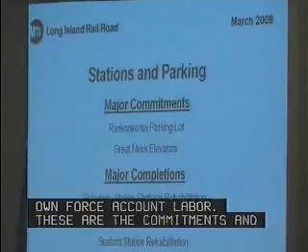Our first commitment is the February 09 award of a contract for the reconstruction of the parking lot in Ronkonkoma, one of Long Island Rail Road's busiest terminals. This photo shows the present condition, including the inadequate drainage and lack of defined parking spots. The project includes fencing, landscaping, and new lighting to enhance our security. We anticipate to gain a few spots when the parking lot is completed.

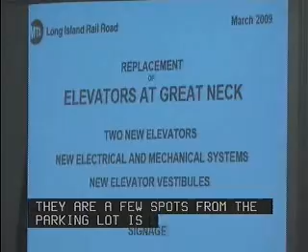The Long Island Rail Road also plans to commit $2.5 million for the replacement of 2 elevators at Great Neck Station, which too is one of our busier stations. This photo shows the eastbound platform with one of the elevators that will be replaced. The contract will include limitations on the period the elevators will be out of service to mitigate negative customer impacts.

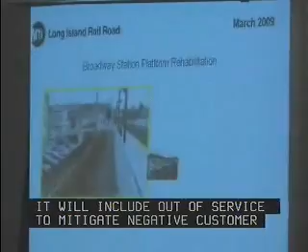With regard to our 2009 completions, we are scheduled to achieve beneficial use of Broadway Station on the Port Washington branch this May. This project includes the demolition and replacement of the original eastbound and westbound concrete platforms west of the station building and in the plaza areas seen in the upper 2 photos, as well as the new passenger shelters, railings, lightings, and communications.

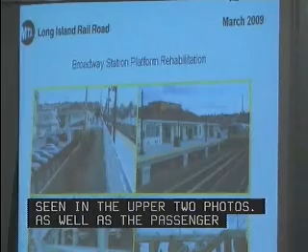Improvements to the site also include a refurbished underpass, ADA ramps seen in the lower left, retaining walls, sidewalks, new stairs, vegetation, and fencing. The picture on the lower right shows the new staircase, which includes the Arts for Transit within the design.

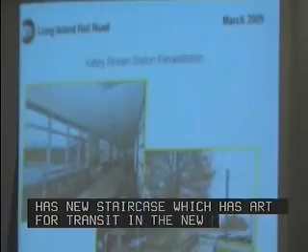Another station under construction is our Valley Stream Station project. The main elements of this project, which is scheduled for completion in June of 2009, includes a new station building, complete with a ticket office, waiting room, and public restrooms. Platform improvements include the rehabilitation of the existing platform waiting room, depicted in the upper left, and site improvements shown on the lower right.

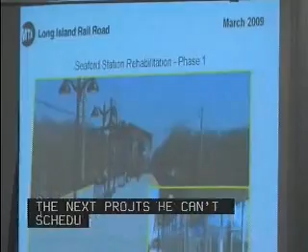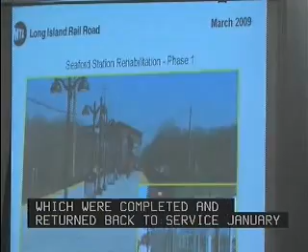The next project scheduled for completion this year is the Seaford Station, which includes replacement of the existing 12-car Center Island platform, platform canopies, the platform level waiting room, stairways, and the installation of a new elevator and escalator. In these photos, you can see the east end of the station platform and the waiting room, which were completed and returned back to service January 31st of 2009. Beneficial use of the west end of the platform is scheduled for July of this year.

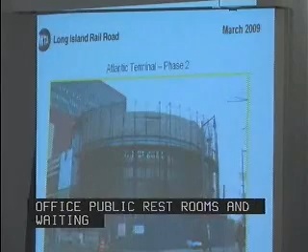The last station and parking project scheduled for completion in 2009 is Phase 2 of the Atlantic Terminal reconstruction, which includes the new street-level entry pavilion, complete with ticket office, customer waiting area, and public restrooms. The project also includes granite tile floor throughout the terminal and platforms, plus limestone walls in the pavilion and a new facility for both police and employees. This photo shows the pavilion receiving the final exterior finishes of stone and glass.

This is an artist's rendering of what the final terminal will look like. It is scheduled for opening in the third quarter of 2009.

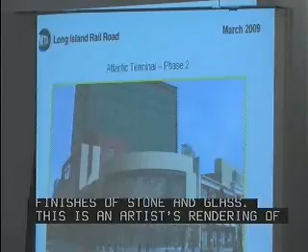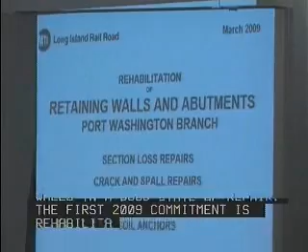With regard to our line structure category, Long Island Rail Road's focus has been on putting our existing bridges, viaducts, and retaining walls into a state of good repair. The first 2009 commitment is the rehabilitation of over 5,500 linear feet of retaining walls and select bridge abutments on the Port Washington branch. Work includes concrete repairs, waterproofing, and the installation of soil anchors. This project is scheduled for completion in the fourth quarter of 2011.

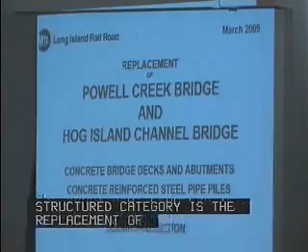The second major project under our commitment plan for the structure category is the replacement of both Powell Creek and Hog Island bridges, which are located on the Long Beach branch and traverse waterways. These bridges are over 80 years old and have timber supports as main structural elements. The scope of the work includes complete replacement of the bridge piles, using a combination of steel and concrete structural elements.

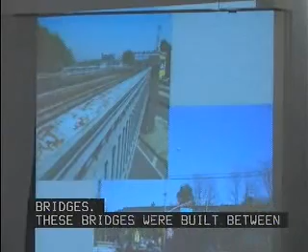Our last project commitment in this category is the rehabilitation of the Woodhaven and Queens Boulevard bridges. These bridges were built between 1910 and 1926 and are located on our Main Line and Port Washington branches just east of Woodside Station, where they are utilized by almost all of our daily train service into and out of Manhattan. The scope of this work includes abutment, steel repairs, and waterproofing.

For our commitments under communication and signal, I will discuss 3 projects.

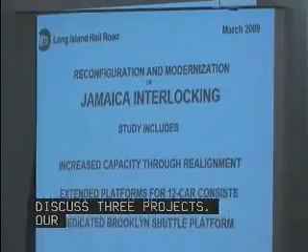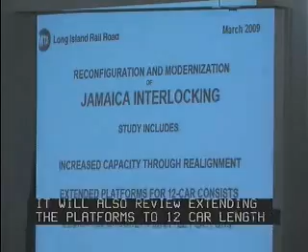Our first 2009 commitment is the reconfiguration and modernization study of Jamaica interlocking. This study will assess the best way to reconfigure the existing 100-year-old Jamaica interlocking, which has over 150 switches, to enhance the track alignment and to increase our throughput. The study will also review extending the existing platforms to 12-car length and the addition of a 6th platform for a dedicated Brooklyn shuttle. The Jamaica reconfiguration is one of our most critical projects because increased train capacity is a necessity to support our East Side Access Service Plan, as well as the railroad's plan to modernize Jamaica.

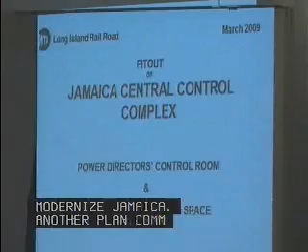Another planned commitment is Phase 2 of the fit-out of the Jamaica Central Control Complex, which is a critical part of Long Island Rail Road's plan to build a centralized train control system to improve our dispatching capabilities and repair crew responses. This photo shows the area on the 6th floor JCC building where offices for both the operational staff and the future power director's office will be fitted out.

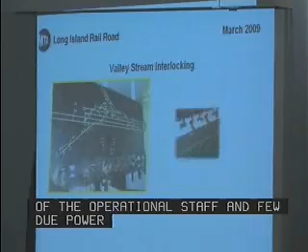The 2009 completion is the cutover of the modernization of the signal system at Valley Stream Interlocking, which is scheduled for the 4th quarter of 2009. This project will replace the existing vital relay-based system with microprocessor technology, eliminate the air compressor plants that supply horsepower to move the track switches, and replace the outdated supervisory systems that control signals on 4 adjacent branches.

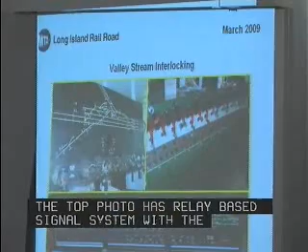The top photo illustrates the existing relay-based signal system with the 1933 Model 14 switch control board at Valley Tower, while the photo on the bottom shows the new microprocessor-based system. This improvement will remove the need to have someone manually move the levers on the Model 14 machine, or as they say, throw the iron, and now just a simple input into a keyboard is all that is required.

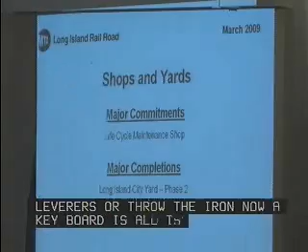Under the shops and yards category, we have 1 commitment and 2 completions scheduled for 2009. The first commitment in this category is the reconfiguration and upgrade of our shops at Hillside Maintenance Facility to improve the Long Island Rail Road's ability to implement life cycle maintenance for our fleet. The Hillside facility, which is coming up on 20 years of age, is the Long Island Rail Road's main electric fleet maintenance facility.

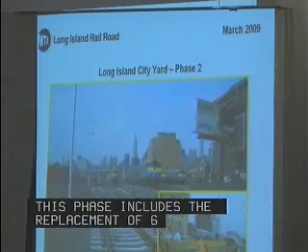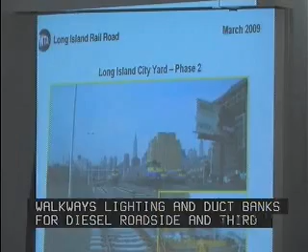With regard to 2009 completions, Long Island Railroad recently achieved beneficial use of Phase 2 of Long Island City Yard. This phase included the replacement of 6 existing tracks with 5 new yard tracks, as well as construction of a new 2-car passenger platform and 2 new car cleaning service platforms. Work also included remediation of contaminated soil, fueling facilities, paved roadways and walkways, lighting, and duct banks for future diesel, wayside, and third rail power. In these photos, you can see the new tracks with concrete ties, and in the background the new car cleaning platforms to the left of the engines.

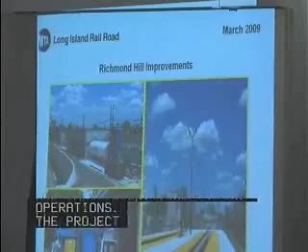The last 2009 major completion is the Richmond Hill Yard Improvement Project. This yard is where Long Island Rail Road's diesel fleet is maintained and serviced, and thus is critical to our operations. The project will include the construction of new diesel fueling facilities in Richmond Hill, 2 new service and inspection pits, an engine wash area, and a sanding facility for our diesel locomotives. Beneficial use is expected before the end of this month. Any questions?

Great work. Thank you very much. Mr. Chairman, if I might, just two comments. Not that I haven't heard it before, but I've heard it before.

The only thing I would ask, either next month or shortly: a number of months ago, I think it was last year, this board approved a short-term improvement study and improvements for the third track area, the main line development corridor. That project is an essential component of the railroad's expansion process, and I'd like to get some idea of where we are on that aspect of it. We can do that for you. That would be very helpful. I think the committee would like to know, because the railroad's expansion is dependent upon something happening in the main line corridor, and that's why either we do it long-term or short-term.

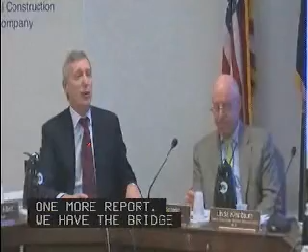All right, next round. One more report. We've got the bridge and tunnels. Tom and your folks, you're all that stands between us and lunch. I understand how important your report is. Sorry, but we need to laugh a little bit.

Okay, well, why don't we pass out your handouts, and we'll start. Technology is not what it's said to be.

Go ahead, Tom. Okay, well, my name's Tom Bach, and I'm the chief engineer with Bridges and Tunnels, and today I'll review our 2009 capital commitment and completion plans, and also two projects that we're going to be starting this year. I'd also like to review one major completion that we will have, and that's our deck replacement job on Randall's Island. And lastly, I'd like to update you on some positive progress relative to some issues that we've had to close out our Bronx Whitestone redecking project.

Generally, our 2005 to 2009 capital program is in very good shape. We committed and closed out record levels of work in 2008, and presently we've completed or committed nearly 90% of our 5-year capital program. Only two significant projects remain to be committed this year. One has already been bid, and award is expected in the second quarter. The remaining project was bid in 2008. The bidder was declared non-responsive and we will rebid the job later in the year. So barring surprises, we're confident we'll achieve 100% of our 5-year goal before the year is out.

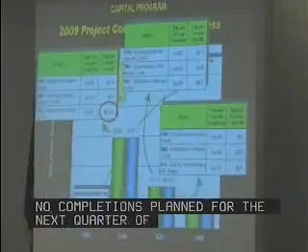Okay, that's our commitments. And next we'll look at completions. We had no completions planned for the first quarter of this year, but we are on track to complete more than $490 million of project work in 2009. And this total will be the authority's record level of completions.

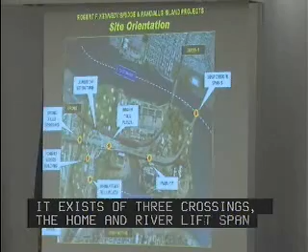Recall I said I'd talk about two major awards for 2009. Before talking about the first of these projects, TB59, the rehab of Building 104, I'd like to take a minute and explain the vital role this project plays in the R.F. Kennedy Bridge master plan. The aerial photo shows the layout of the RFK Bridge. The facility actually consists of 3 crossings: the Bronx Kills Crossing, the Harlem River Lift Span, and of course the Queens Suspension Span. These 3 bridges are linked by a viaduct, and all traffic is guided to its destination by a collection of ramps and an interchange, which is referred to as the junction structure.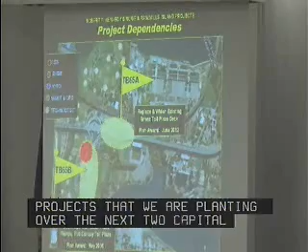The aerial photo shows the location of the upcoming toll plaza expansion and redecking projects that we're planning over our next 2 capital programs. And as you can see, the current work locations of Bridges and Tunnels and PD employees conflict with the planned plaza projects. We have hundreds of personnel and shops and warehouses located directly underneath these plazas.

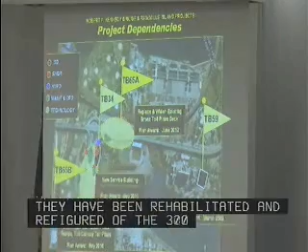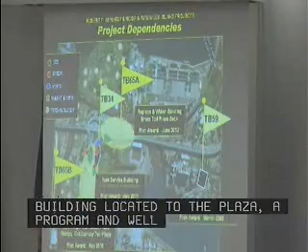Under Project TB59, Building 104 would be rehabilitated and reconfigured to relocate approximately 200 B&T employees and approximately 110 police department employees. When the PD is successfully relocated into Building 104, we can commence site work on a new combined shops, warehouse, and service building located adjacent to the plaza. This work will commence in the latter part of the 2010-14 program, and when all occupied space below the plaza is vacant, only then can the plaza reconstruction continue. As shown here, Building 104 will provide space for approximately 300 employees located below and adjacent to the toll plaza area.

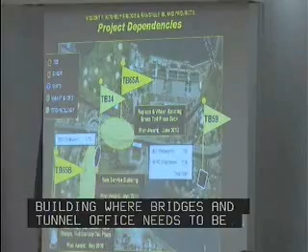What's going to happen to Building 104 after everybody moves to the new building that's adjacent to the plaza? We will need two buildings, Commissioner. Building 104 is going to essentially give us space for New York City Police, for our security people, our engineering people, and some training staff. The new building adjacent to the plaza is a service building where our bridge and tunnel offices need to be relocated so they can collect their tolls and do their daily operations in immediate proximity to the plazas.

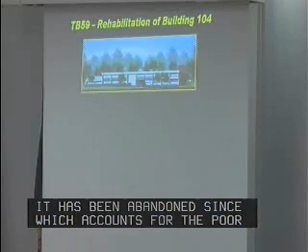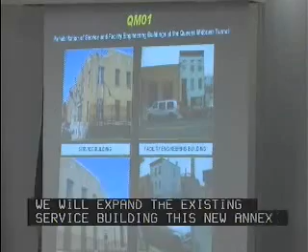As I mentioned, we'll also award a contract for the rehab of the service building at the Queens Midtown Tunnel. Our existing facilities at the QMT are shown here. We will expand the existing service building. This new annex would house both the facility engineering staff and major elements of our operations and maintenance management crews.

We took bids for this job in 2008. Low bid exceeded the budget by about 10%. The low bidder unfortunately made an error in his calculations, and we're going to rebid later in the year.

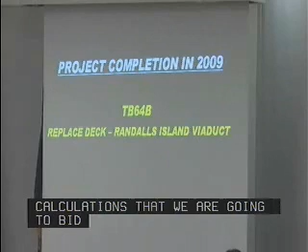We said we'd complete a record level of projects in 2009. This includes the completion of the largest project by dollar value that the authority has ever undertaken, and that's the redecking of the Wards Island, Randall's Island Viaduct of the RFK facility, which we call Project TB64B. This project is scheduled to reach substantial completion this summer.

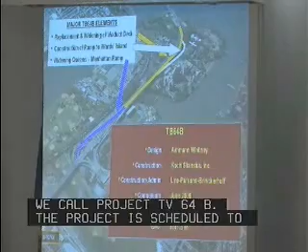The project has three main components. The widening and redecking of the Randall's Island Viaduct is shown here in orange. The colors sometimes aren't good with these. The new ramp to Wards Island is shown in white, and the widening and redecking of the Queens to Manhattan ramp is indicated in blue.

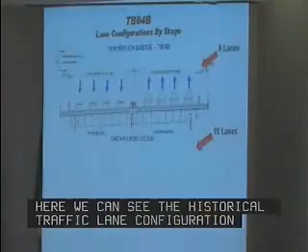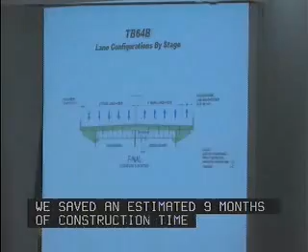Here we can see the historical traffic lane configuration on the viaduct prior to the start of this project, 4 lanes to the Bronx and 4 lanes to Queens. The graphic at the bottom shows the ultimate configuration of the job, 5 lanes to the Bronx and 5 lanes to Queens. There were considerable advantages to this 10-lane configuration. We saved an estimated 9 months of construction time, which improved traffic flow, and we also minimized traffic accidents during construction, which is, of course, a major consideration of ours.

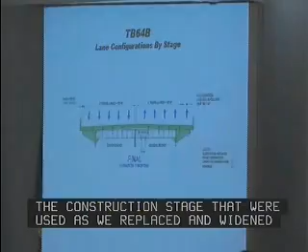This series of diagrams takes us sequentially through the construction stages and illustrates the different lane configurations that were used as we replaced and widened the deck. As I said, as a preliminary stage of construction, we were able to widen the viaduct from 8 to 10 lanes. This permitted us to maintain 8-lane traffic capacity on the original viaduct while attacking construction in two-lane bites.

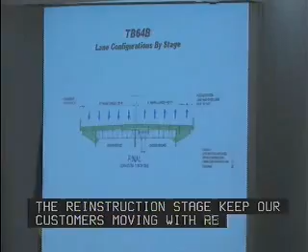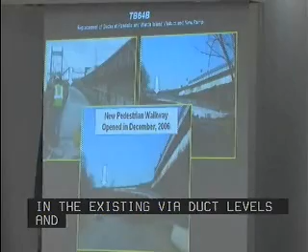Here we see a new pedestrian ramp that was opened in 2006. This ramp will deposit pedestrians directly and quickly into the park below our viaduct. This new ramp replaced thousands of feet of existing viaduct-level pedestrian walkways. There were cost, schedule, and security advantages to B&T with this plan, but the main beneficiaries are our park-bound pedestrians who can now enter the park without first needlessly traversing miles of elevated viaduct walkway before accessing the island.

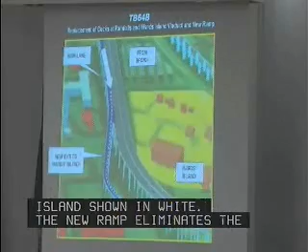TB64B also included the construction of a new vehicular ramp to the island, which is shown here in white. The new ramp eliminates the current substandard geometry of the Bronx to Randall's Island exit. The geometry of the former exit forced Randall's Island-bound traffic to cross 7 lanes of the Manhattan Plaza to reach the island. Elimination of this traffic crossover will improve safety and operations, and this improvement will become even more valuable when the Randall's Island Park is fully developed and park-bound traffic increases. This ramp will also open up this summer.

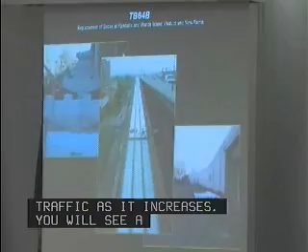And here we see a picture of the ramp being ready for its decking, and the abutment has been completed in this shot. These two pictures on the left show the completed ramp, and the two photos on the right show the bottom of the ramp where it touches down on Wards Island, which is very close to our new Building 104, which will help our daily commute. As part of this project, we also widened the Queens to Manhattan ramp, shown here in white. These shots show some deck installation.

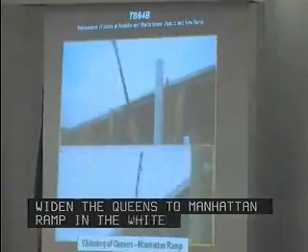And next we'll see a long-range view of the improved Bronx Plaza. As you can see, the widened Queens to Manhattan ramp is operating with all 3 lanes. However, the main component of this project was the widening and redecking of the viaduct. New piers and steel support brackets were installed, and precast deck panels were installed to speed construction.

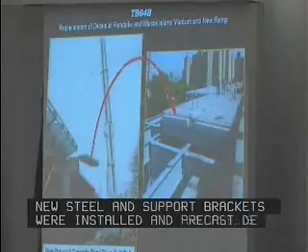And I'll close with just a few shots taken last week. You can see the pedestrian ramp, the ramp to Wards Island, and the last section of deck, mainline deck that we're working on. They're about to be replaced, and again, we'll have that done this summer.

Now I'd like to update you on some positive progress to resolving some structural issues that we've had, and to close out our project BW82, redecking of the Bronx Whitestone Bridge suspended span. These issues have been tracked by our independent engineer and are discussed in their report to you.

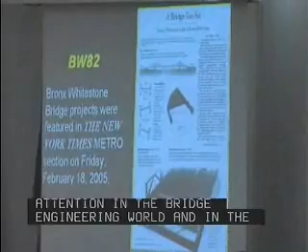Project BW82 is a project that we're quite proud of. It generated a great deal of attention in the bridge engineering world and in the media. It was innovative and pioneering, and it was very successful from a schedule and budget perspective. The project accomplished 2 authority goals at the Bronx Whitestone. First, to replace the deteriorated roadway decks, and second, to reduce the overall mass of the structure, thereby reducing dead load and increasing the usable life of the suspended structure.

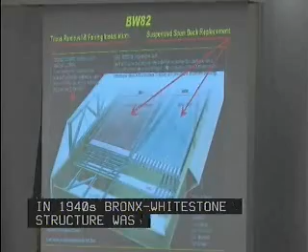In the 1940s, the Bronx Whitestone structure was modified to counteract aerodynamic loads, and roadways were added to accommodate added traffic. These changes increased the stress on the global structure. Using modern computer-driven aerodynamic techniques and incorporating modern structural systems, we were able to reduce this added load and lengthen the useful life of this old and graceful structure.

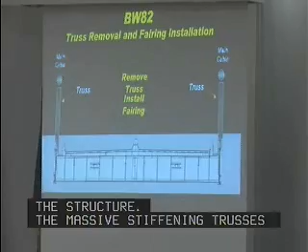The massive stiffening trusses added by Robert Moses after the famous 1940 Tacoma, Washington bridge collapse were replaced with lightweight fiberglass wind fairings. The heavy reinforced concrete roadway decks were replaced with lightweight steel orthotropic decks. Fabricated deck sections stacked and waiting for installation are pictured on the right.

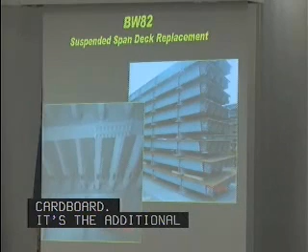I would call it the steel equivalent of corrugated cardboard. It's the additional ribs to the steel deck that gives it its strength and its lightweight, Commissioner. No, the road surface is epoxy or a combination of epoxy, wearing surface, and asphalt. We've used both in our lay down on top. That's correct. And this is different from the old one because you used to lay down the asphalt on top of reinforced concrete. Correct. And that was a component of the added weight on the structure.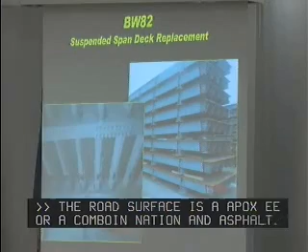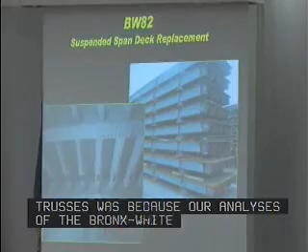Okay. You buzzed through the fact that you got rid of the trusses, which is cute, but you haven't said anything of why you thought that was safe or engineering-wise would work. Well, the reason we removed the trusses, Commissioner, was our analyses of the Bronx Whitestone Bridge gave us some cause for concern since its original structure had been modified and so much weight added. It was the opinion of the bridge experts that the life of the Bronx-Whitestone Bridge could be increased significantly by

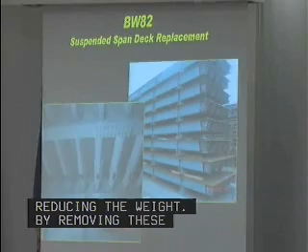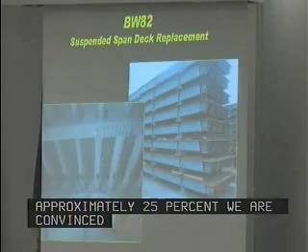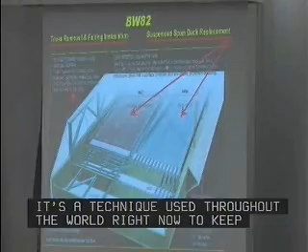Yes. And so you're now excited about the super lightweight fiberglass fairings? Yes. That's the fairings or something else, right? I'm showing a picture. Actually, you can see a fairing off to the right. And what that does is make an aerodynamic shape which allows the wind essentially to pass smoothly over the structure. It's a technique that's used throughout the world right now to keep suspended span bridges working and to keep the dead weight down. Okay.

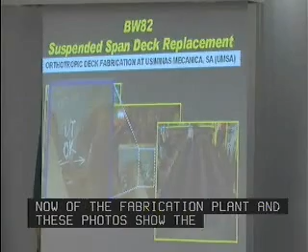Moving forward, we have some shots now of the fabrication plant, and these photos show the decks in fabrication. Note the UT-OK mark on the steel, meaning these welds have passed non-destructive UT or ultrasonic quality control checks. Here, samples of fabricated deck are being torn apart and analyzed. Destructive testing, also as part of our quality assurance process. Robotic weld machines are being checked before the start of every shift.

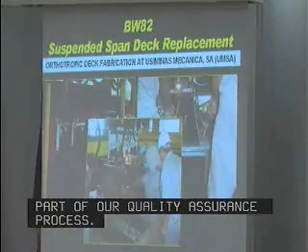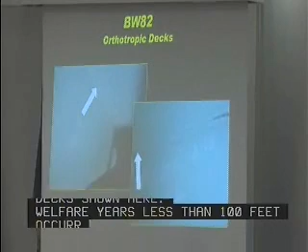Deck installation was completed in late 2006. Follow-up inspection in early 2007 revealed a minimal amount of weld failures on the decks, shown here. The quantity of weld failures, less than 100 feet, occurred within approximately 300,000 linear feet of weld built into the project. This represents approximately 0.03% of the total weld quantity on the job.

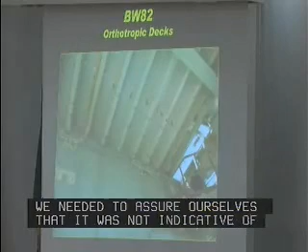This amount of repair or punch list type work on a job of this size would typically not cause alarm or concern. However, we needed to assure ourselves that the problems represented an anomaly and were not indicative of a larger systemic issue. In conjunction with our contractor, Perini OG, our designer and noted experts, we began to monitor and investigate the weld failures. Strain gauges shown here were installed selectively to determine actual levels of stress. Our contractor also cut out samples of good and bad welds for laboratory analysis and test.

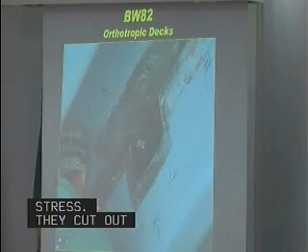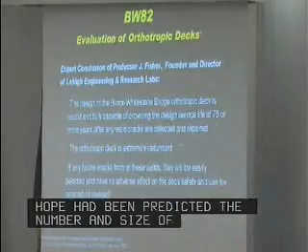Elsewhere, repairs were made immediately by the contractor at his sole cost. These tests revealed a localized fabrication problem that was limited in scope and unlikely to escalate or propagate. Theory aside, and perhaps more importantly, the results of regular inspections indicated that, as hoped and predicted, the number and size of the cracks increased only minimally after the initial onset of problems. In short, after nearly 2 years of study, we've concluded that these problems are localized and won't propagate.

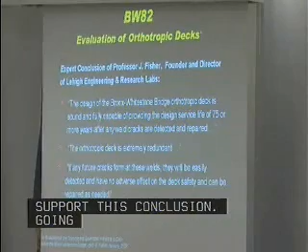Nationally renowned experts, Professors John Fisher and John Barsom, our independent engineer, and our noted design firm, Weidlinger, fully support this conclusion. Going forward, our contractor has proposed to compensate B&T for our costs incurred to date and the cost of future inspections and monitoring. The contractor has also agreed to provide a bond or bonds acceptable to the authority to protect B&T against any possible, though unlikely, repair costs of this type. With these assurances, we plan to close out this project, and that concludes my report today, if anyone has any questions.

How does all this relate to the discussion we had a while ago about overweight trucks on these bridges? We have designed the modern deck for heavier truck loads than originally designed for. The problem that we had, Mr. Chairman, was a fabrication error which, when corrected, will have no negative effect whatsoever on the future of the structure. Different question. He's asking about the wear of the trucks, wearing surface. Does this new driving surface somehow spread the weight better than the former construction did? No, I wouldn't say it spreads it any better, but I would say it spreads it as well with lesser dead weight and lesser negative impact on the structure.

Orthotropic decks, Commissioner, are a technology that have been used in Europe for 20 years quite successfully, and most modern bridges, frankly, are built that way. At least modern suspension bridges. Was that bridge originally built like the Brooklyn Bridge with an open grating as the driving surface, or has it always been concrete? It's always been concrete, and in its original configuration, it only had 2 lanes in each direction. The bridge was widened several decades ago to add additional lanes of traffic, and that also added to our concern about the overall dead weight and live load applied to the bridge.